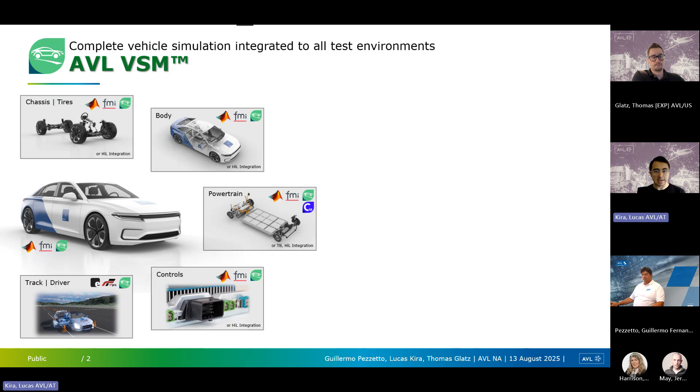So that's why we normally use our complete vehicle simulation approach. We create models that are real-time capable, that can be developed in the office and be extended if you have more detailed modeling for powertrain, even controls, strategies related to chassis, powertrain. We can extend it, and as soon as it's real-time capable, we can use it also in the test bed, in the driving simulator, in the hardware-in-the-loop environment. So we always have this approach to first develop the models in the office as much as possible. We can make much faster than real-time development, and then we move with these models to different studies, different applications that are real-time related.

So we are using VSM Race, that's why we have Guillermo today. Depending on the application, we even have trucks, tractors, special vehicles like defense, or even special applications like lunar vehicles. This is all supported with the physics of AVL VSM, and then moved to real-time environments, as you can see on the right side, an example of a big driving simulator.

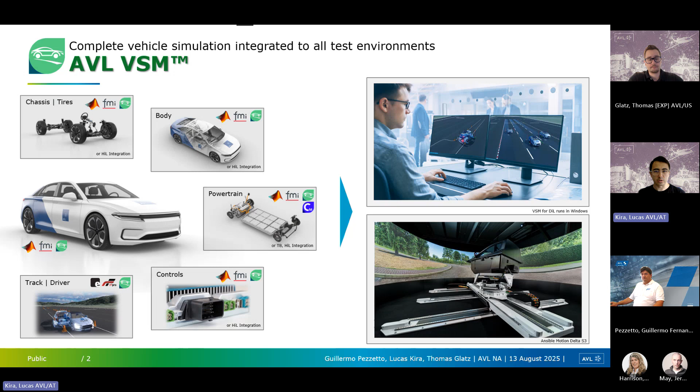So today I would like to focus mainly on the office part, how we prepare the models, and then how we use the model in a small driving simulator, cost-effective setup. Then maybe in the next webinar, we can have more focus on a complex setup or a big driving simulator connected to the test bed, to the hardware-in-the-loop bench, for example. But basically the main message: the same model that we develop in the office can be used across the different development phases, but also environments. So this is message number one.

I like this approach. Guillermo always highlights this. If we have the same model being used by different environments, different departments, then we can further develop the model and get to a level where the model is extremely good to replace a good amount of physical testing.

So we can bring a lot of testing from proving ground to the driving simulator. Of course, the driver in the driving simulator cannot, as a human, take a lot of cases like 24 hours a day. So this is something where we need to make some, I would say, objectification of the assessment in the office, but also in the driving simulator.

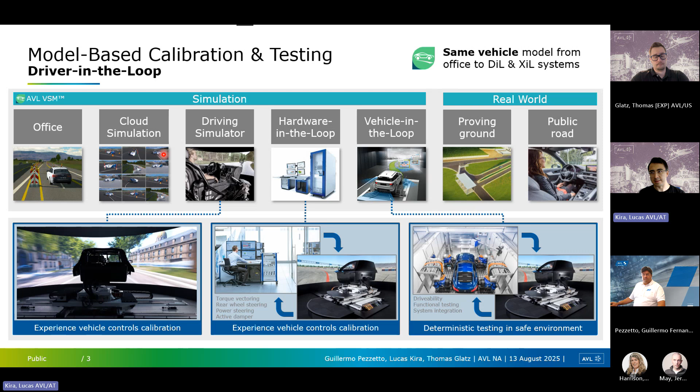So just pointing the workflow, why this part is so important. So between creating the model and correlating the model when data is available, or maybe previous data from previous projects or similar vehicles would be available as a starting point, this would be instead of 2-3 months, now we are talking about a few weeks when the input data is available. So we have a lot of new development approaches like AI based to fit the model, to fine tune the model. So on one side we have experts, on the other side when we need to correlate some topics where AI can take place and support the activities without the need of an expert, we use it.

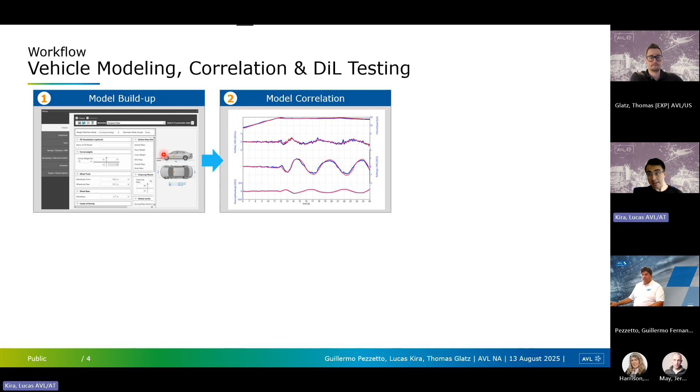So this is not something that we are looking at in the future. This is already the reality. And then we run cloud simulation in case a lot of investigations are needed, in case we need to run maybe some optimization or even go through many parameters or maps. A combination, even full factorial sometimes is done when we apply the proper, I would say, limits.

And then we finally move to a very basic setup. So you look like, okay, it's a gaming monitor. It's a gaming steering. Yes, it is. So it's basically a very simplified version already integrated in AVL VSM, and basically it's a visualization of AVL VSM. It's a USB connection. That's not a professional application, but it's a pre-testing. So in this phase, we check if everything is smooth, so we don't block the driving simulator.

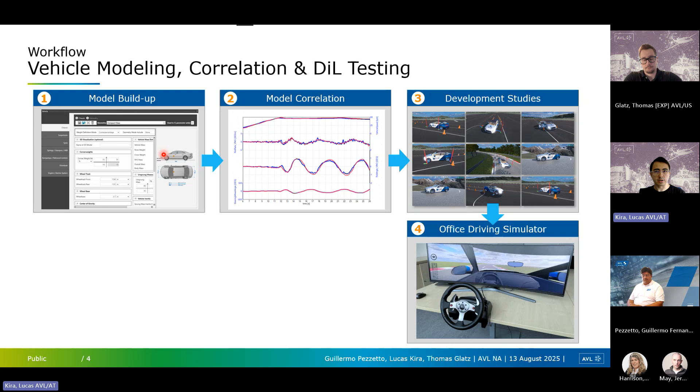And then we finally move to the big driving simulator when things are already released and checked in the office. So of course, in between 4 and 5, we also have static driving simulators. So there are always possibilities, and that's the focus for today's webinar. And then depending on the setup you have, you can really do calibration decisions, updates, improvements on different components: steering, suspension, even controls. Depending on the hardware and software toolchain you have, you can really bring a lot of things from the proving ground to the driving simulator.

So I would mention again that number 1 and 2 is now quite squeezed into maybe 2 weeks, 1 week, when we know the inputs and when we use some AI approach integrated in this tool chain, so that we can quickly move to the other topics that are the focus. So that's the trend. It's something that the market is pushing for. All the time you get requirements from different colleagues, customers, partners. I think that for racing sometimes it's even more challenging.

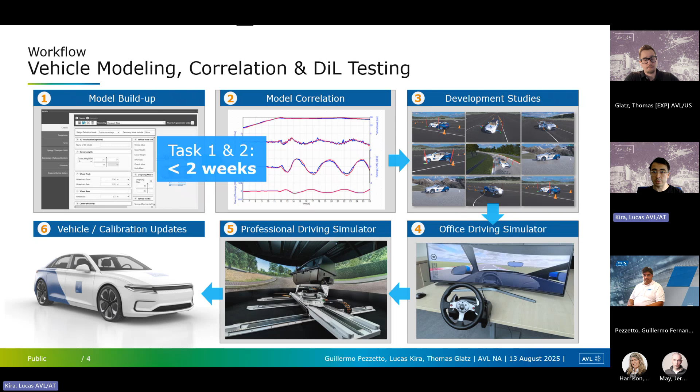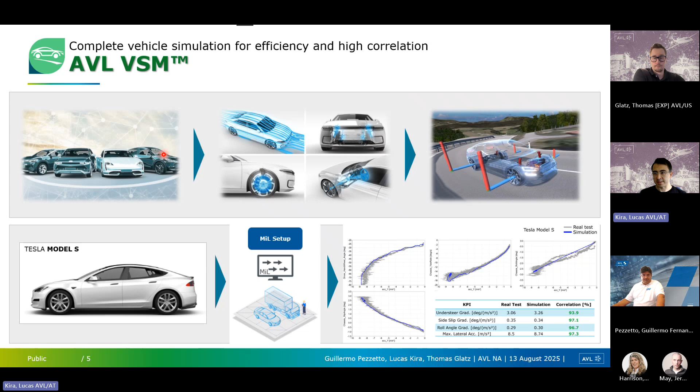Guillermo can comment, but basically that's, I would say, the lean approach when we have the possibility to reuse some data, some input data from benchmarking, or getting the data from the manual of some vehicle. So that's the approach. So how do we do it? In case of benchmarking, or even in case we have data from a customer prototype itself or a new model, we immediately model and correlate in VSM, and we check in the office.

Just an example of Tesla Model S, some of the lateral dynamics parameters, if that's the focus for the investigation. So we have a look at the model in the office using a virtual driver, a very robust but still virtual driver, and we focus on different KPIs. Sometimes we even go further into longitudinal performance, braking, so more transient maneuvers. And when things like that are finished, released, then we are ready to go to the driving simulator.

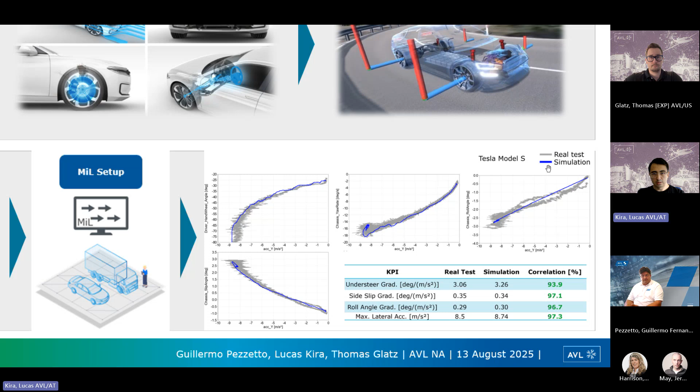And I would say not even into a big driving simulator. Some hours ago, we were together. So Guillermo and I, we were in the small driving simulator, pre-testing things that would go to the big driving simulator in the next days. So that's the focus.

So on top, you see a vehicle that was modeled from benchmarking data. That's the Ioniq 5, and we pre-tested first in the small driving simulator to check if everything is consistent. And then we had the chance to drive in the Delta S3 from Ansible Motion, the same maneuvers, the same slaloms, and to have a proper feeling, including some maneuvers like one-to-one motion.

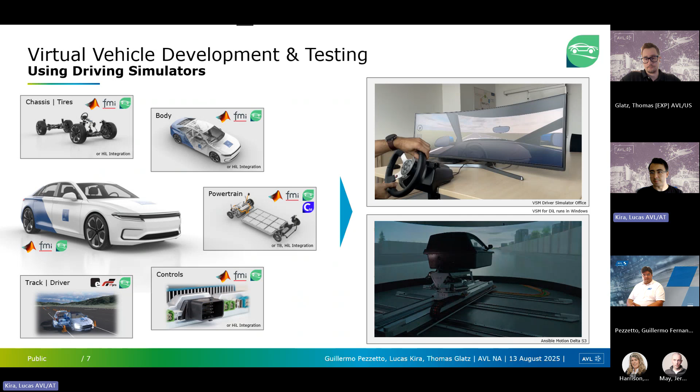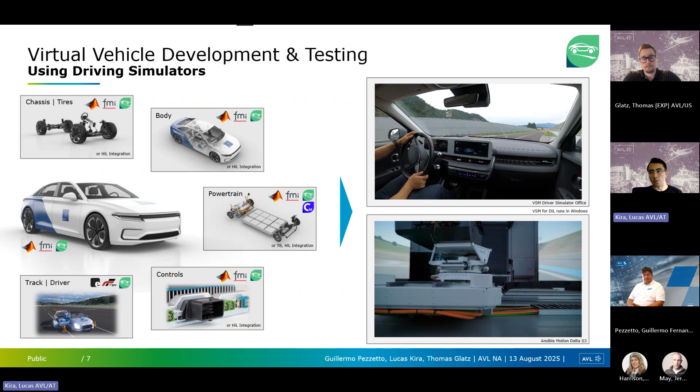So this is basically showing a big gap between the very lean, very basic approach and state-of-the-art, I would say, best-in-class driving simulators. So in between, we have a lot of options, and those are the options that we will maybe focus on today. So the office part, I already mentioned that we have the visualization included. So you don't need to have external or third-party visualization software, struggling with the toolchain, or even getting additional licenses or special tracks. So you have all in VSM for the preparation.

I would like to invite Guillermo to highlight the static driving simulator that can maybe be a hybrid between gaming and professional. Maybe Guillermo can introduce the topic. Yes. Thank you, Lucas, and welcome to everyone.

The one that you see in the middle is actually, like Lucas said, a hybrid. We are using very high quality gaming hardware, so it's not any standard hardware that you may find anywhere. It's really high end, and combined with real car hardware. In this particular case, we have real dashboards with data logging capability from Bosch. We have the real steering wheel, real button boxes with different functions of the car.

And in this case, each screen is the new Samsung Ark 55-inch with a 1 meter radius, three of them covering a horizontal field of view of approximately 210 degrees. So the diameter is 2 meters, what you see there. So it's extremely compact, as you can see, running in an office in a professional way. This setup was also meant to be used for hardware in the loop, for example, vehicle control units or others. So this is a very good compromise between professional, static, and cost, because you can do even hardware in the loop with a simple setup.

Some current projects that we are working on: we will connect that type of simulator to testbeds. So you can run the unit under test directly from the driving simulator. It can be a full vehicle, a combustion engine, electric engine, battery, gearbox, maybe even brakes. So I think it's a very interesting setup because it's very affordable, but with really, really high quality components. Okay.

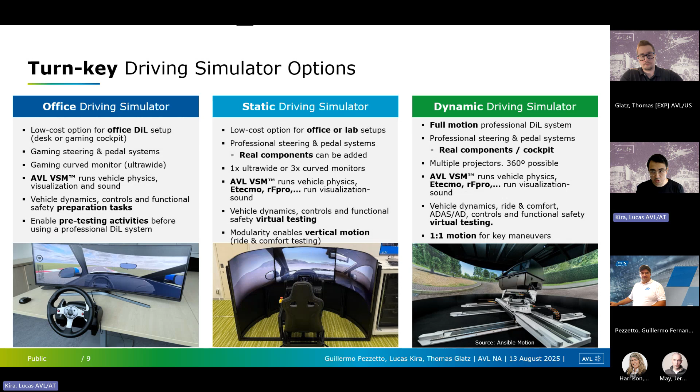Yeah. So basically, the same modules would be able to run these three different setups, and in between those three, I think that there are also some possibilities. There's a lot of customization possible. It's always up to the customer.

But again, like Lucas highlighted, same model: the VSM, the vehicle simulation model that runs in the office, in the static, in the dynamic, is exactly the same model. So one-time effort to correlate, to create, and run on different targets with the same model. We are not simplifying, we are not using a different model for the office and a different model for the driving simulator like many of our competitors. Our approach has been and will always be the same model. Exactly.

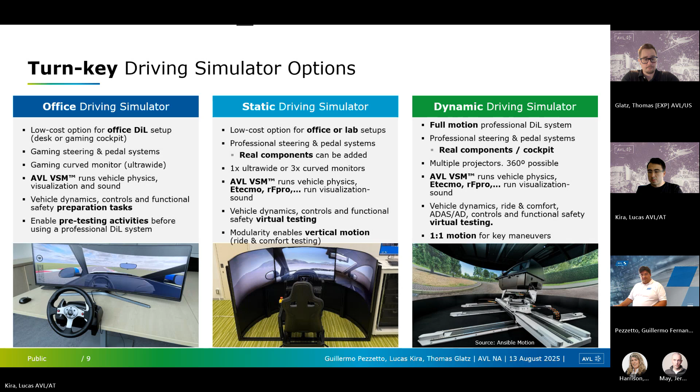And maybe it's interesting to mention also Windows-based PC. So this is quite, I would say, unique. And moving to the different possibilities, I mentioned that there would be some in-between options. So I think that Guillermo can highlight. He's testing a lot of different components. He's checking not only the technical specifications, but bringing drivers and also connecting directly to customers that are using them. So maybe you can highlight the main differences. Now I see the three pictures, but we will also show later one with a single monitor.

Yeah, that's the first option. Basically the same. We are testing every hardware that is available in the market. Like I said, not everything that is supplied as hardware for eSports can be used. So we are really handpicking the right ones, and sometimes even create our own interfaces, especially when we like to have everything on CAN bus and not a USB connection.

Actually, here in Graz, we are setting up a couple of them, so our customers can have a feeling of driving. You will see a multi-million driving simulator, and then go into a 10,000 euro or even less driving simulator with the same software, the same vehicle model, the same tracks and environment.

So they can really have a feeling, because if you need to do some basic function tests, like maybe does my CAN bus communicate properly with my hardware in the loop, or is my torque vectoring algorithm actually working, communicating, you don't need to go to a very expensive simulator. The cost per hour is really high. And if you need to debug the model or the connections in very expensive hardware, you are actually losing efficiency.

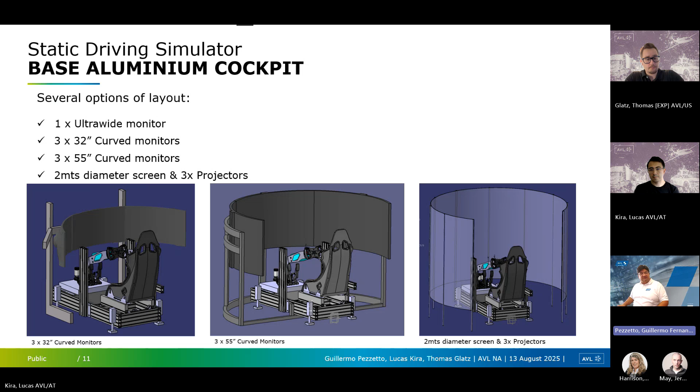And again, we do not try to over-engineer; it is always depending on the application. We will look for the right solution for the right application at the best affordable budget. Look. Yeah. So these I would say are examples number 1 and 2. So we mentioned a single monitor.

Basically, this is a 34-inch ultra wide. Actually, this is my home office setup. So this is my private setup. So I can just change the computer, put the professional physics from VSM. If I need to move to a different application, gaming and so on, I just use my private computer. But it's simple, in a way that I can pre-test things. As I said, in a very basic setup.

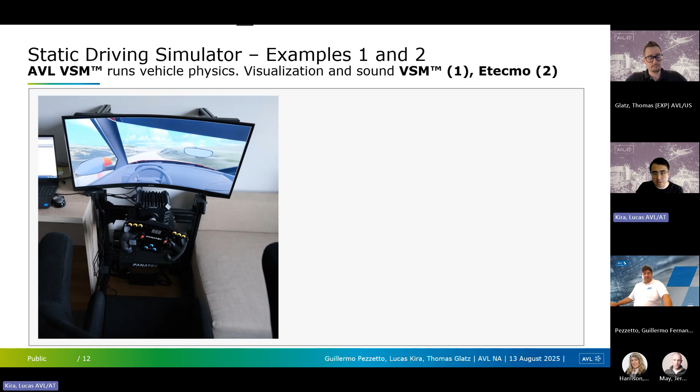In this case, it is USB. Of course, it has some limitations. That's why we also focus on similar, I would say, hybrid setups, but with CAN bus. So Guillermo, it's actually very important to highlight the one on the left. You can even see the notebook. We are running the simulator from a notebook. Okay. Yeah. Again, visualization and physics. Yeah. Everything in one notebook. Obviously, there are some limitations, but again, depending on your target, it can be as simple as a notebook.

On the right-hand side, this is already a professional visualization with ray tracing. In this case, it's a LiDAR laser scanned racetrack that we have recently created, with a gaming steering wheel, gaming pedals, and a gaming steering motor in a gaming frame. So running with one single PC. It's a big step forward from the left, especially on the visualization and the handling.

You can already feel some handling, especially on the steering wheel, because the steering wheel is good quality, and the information that our simulation, together with, in this case, Etecmo Interact, which is the physical modeling of the track, gives to the steering is very high. So some handling targets can already be done in such a simple setup.

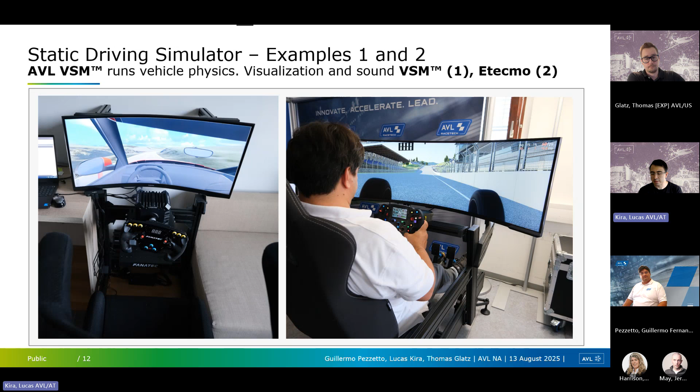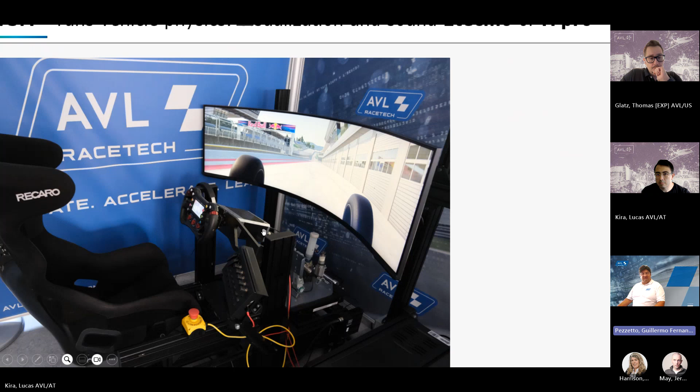So yeah. Then the third option is in the same room, but on the side, and it's more professional. Maybe Guillermo, you can comment. Yeah, in this case, we have a CAN steering motor and a CAN steering wheel. This particular setup allows me to even change different steering wheels with the same steering motor. We have a CAN button box.

And what does it mean? I can change any parameter that the real car can, maybe engine maps or any other, but also, because this is simulation, we have prepared things so engineers can drive and execute setup changes. So setup changes that even the real car cannot do without stopping.

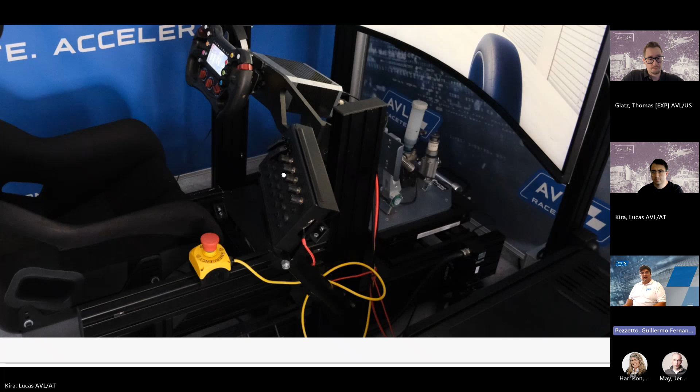For example, ride height, anti-roll bars, wing angles, spring stiffness. So we can do those changes while driving via this box that you see on the middle bottom of the screen, which allows the engineer to operate the system alone and do setup changes that, of course, are later logged in the data set that you download after each lap, and that allows you to do quick setup changes without even the need of two operators, no?

In this particular case, you can see we have already integrated the D-Box. I think it's world famous, potentially one of the best actuators in the game industry today, vertical. We have our own interface, so we are obviously running a much higher frequency than the games. Games are in the area of 400 hertz. We can run 1000 or more hertz, so a lot more information.

It's a very good add-on to the static, let's call it static plus vertical. So you can do heave, roll, and pitch, and add this extra immersion in the driving. I have to say, really good for the value. We're not talking about hundreds of thousands, we're talking about thousands of euros, and it gives a lot of feedback, especially when you're looking into ride and comfort, within limits of course. You will not look into 100 hertz, at least not for the moment, but easily below 20, 30 hertz you can already see. Again, in a very affordable and very small setup.

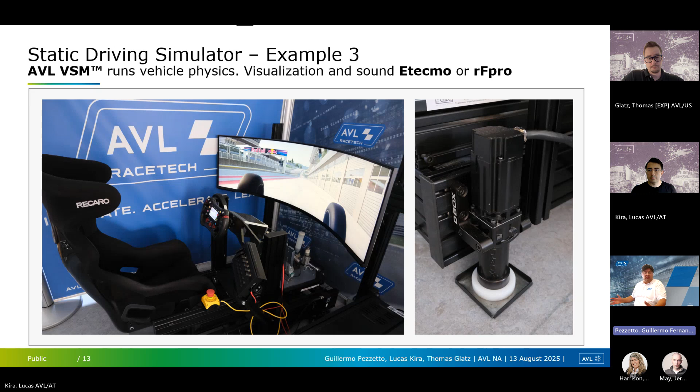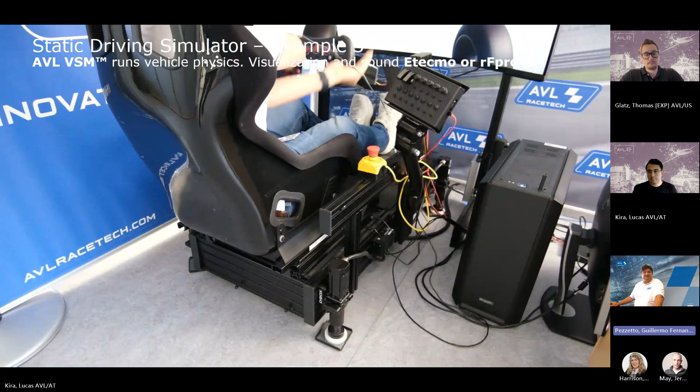Actually, this is running in an office. So here you can see the video. I don't know how good the internet is, how smooth the video is, no? But normally this is smoother. This is a very small setup that can be run properly. Yeah, looks good on my end. The video looks very good. Yeah, and again, we are running at 120 hertz minimum at 4K, what you see right now.

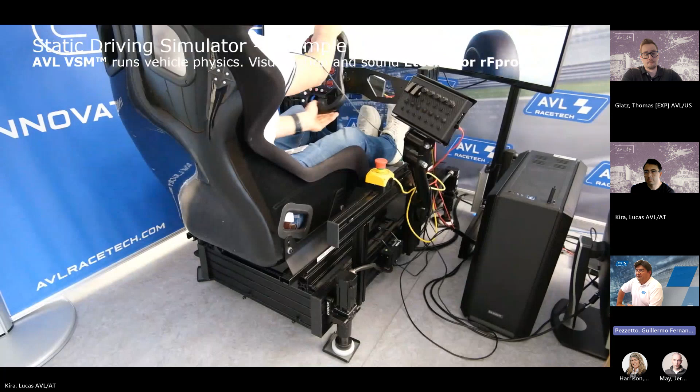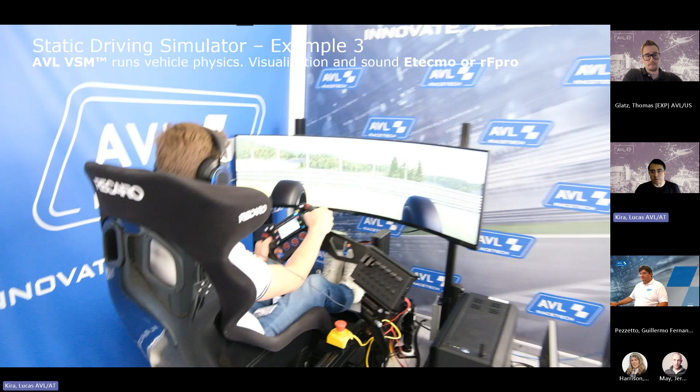And I think it's very important to mention that when we are talking about cost-effective development, it doesn't exclude the big driving simulators. Actually, the opposite. It is always supported by saving testing costs. We don't want to deep dive on the big driving simulators in today's session. It would be nice to have another session because they are saving a lot of costs as well. There's a sequence where we start from the very small driving simulators, but there will be a moment that, as Guillermo mentioned, they bring some limitations on development, and then we start to move to the hexapod, for example, or to the different dynamic driving simulators.

So, for example, you must say how much the price is. Every hour that those expensive simulators are not running efficiently, giving you results, is a lost hour. And that hour needs to be avoided by running in the, let's call it, affordable systems. Also, when you do this investment, you need to target very high utilization. What does it mean? Not only that you utilize it properly, but you need to have a queue of projects, several projects waiting. You are preparing the projects in the office, in the small simulator, running in the big dynamic ones, and this should be a streamline that never stops. Every hour that you don't use it properly is a waste of money. So we want to be efficient.

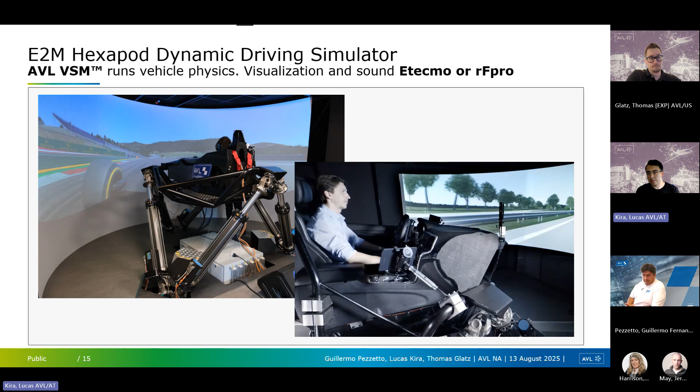And when we are moving to these setups, maybe it would be a next webinar discussion, then you need to think about the building. You need to think about a crane to remove the cockpit in a quick way to improve utilization efficiency. And also, you don't use just the driving simulator, but you have operation.

And once again, same model. Yes, it's exactly the same. I think this is great to see that without this huge financial effort, you can actually learn the tools, the simulation models, how to operate and use them, even as a student through our university partnership programs, or with minimal effort as a startup. Test your models up front before you, for example, rent some time at the AVL simulator, or decide to make a big investment at some point.

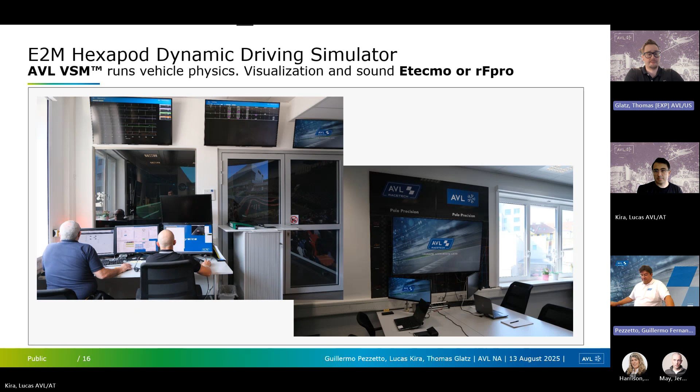Next episode, same time, same place next week, will be about innovative vehicle thermal management development. So we will look a little bit deeper into the powertrain and the thermal management system and how we can model this mainly in Cruise-M.